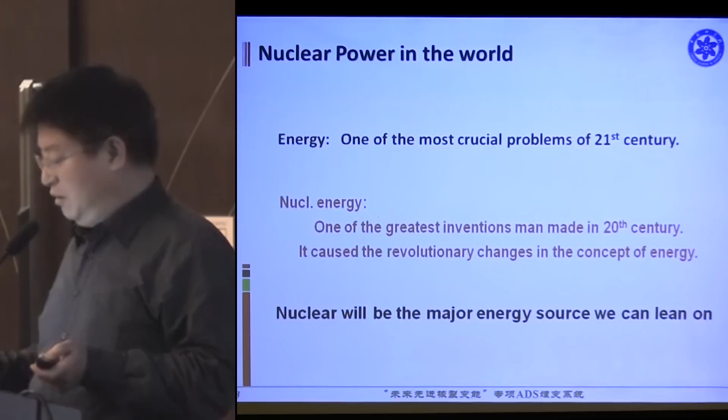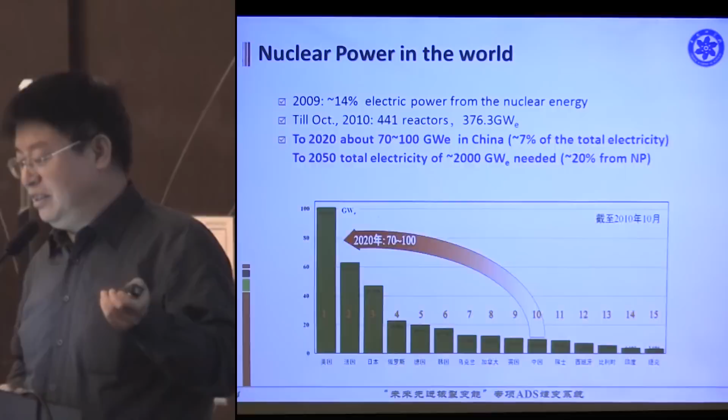Under this condition, we must face two main problems. One is the fuel, and another is the safety.

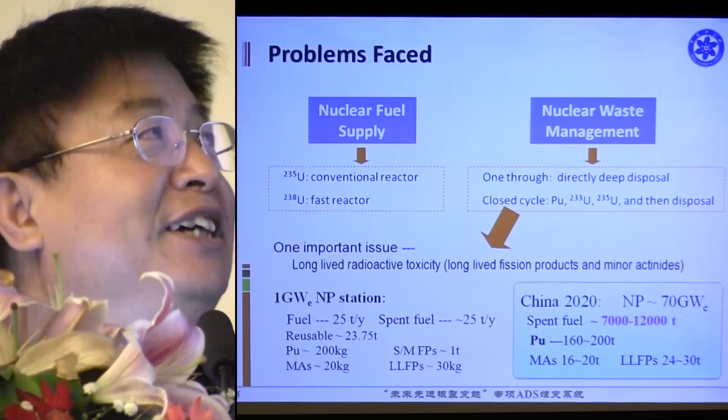For the fuel, you will know that CNNC have tried to solve this problem. And another issue is the waste.

At the beginning, someone suggested one-through treatment of the nuclear waste. But now, mainly we think of the closed cycle for the use of nuclear fuel.

The main important issue of this is the long-lived radioactive toxicity, such as the long-lived fission fragments, products, and minor actinides.

I show you here only one example for a nuclear power station of 1 gigawatt electric, where the fuel used may be 25 tons per year, and the spent fuel is also about this amount. The reusable amount, plutonium, and some short-lived and mid-lived fission products are about 1 ton, the minor actinides about 20 kilograms, and the long-lived fission products about 30 kilograms.

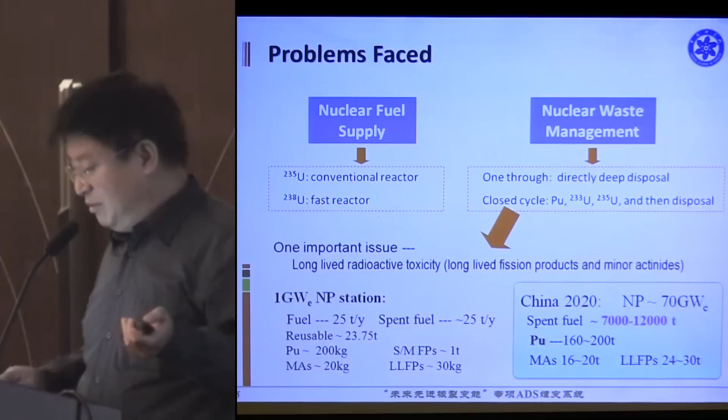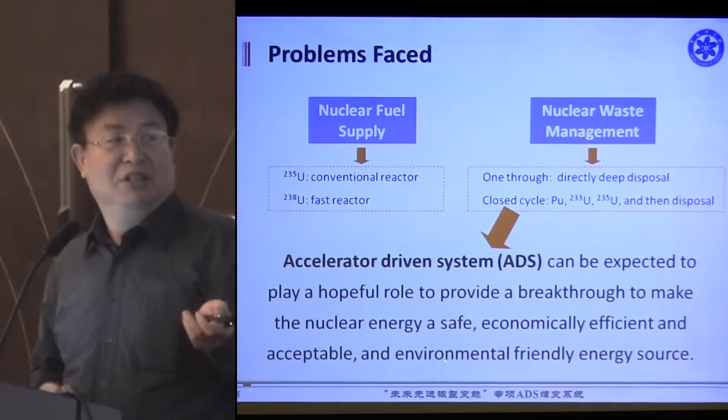So the problem we must address is the spent fuel. A lot of research shows that ADS may play a hopeful role to provide a breakthrough to make nuclear energy a safe, economically efficient, acceptable, and environmentally friendly energy source.

The principle of ADS is to use a high energy intense particle beam to bombard heavy elements and produce high flux of high energy neutrons, which then induce nuclear reactions and transmute the MA and LLFP. The constitution of ADS is the combination of accelerator, spallation target, and subcritical reactor.

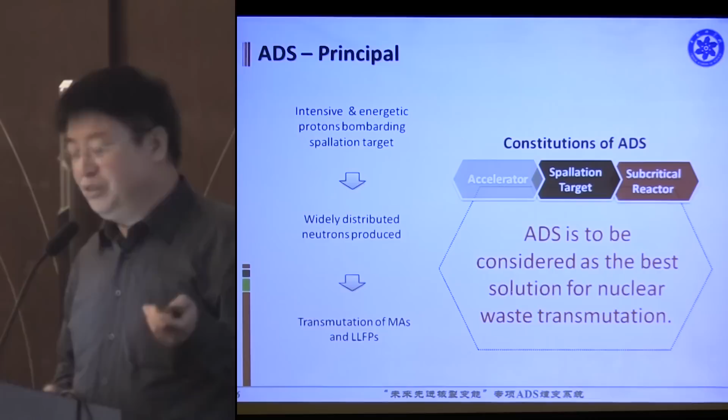From the research results we have got, now we think ADS is to be considered as the best solution for nuclear waste transmutation. This is a nuclear waste transmutation cycle.

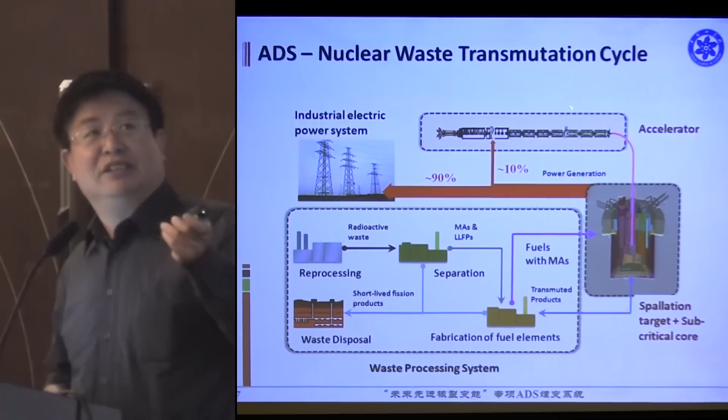This is for the reprocessing of the waste into MA and LLFP, separation, and fabrication of the fuel element for the ADS. During the working of the ADS, heat is generated, which can generate electricity. Part can supply the machine's own work, and another part is for the user.

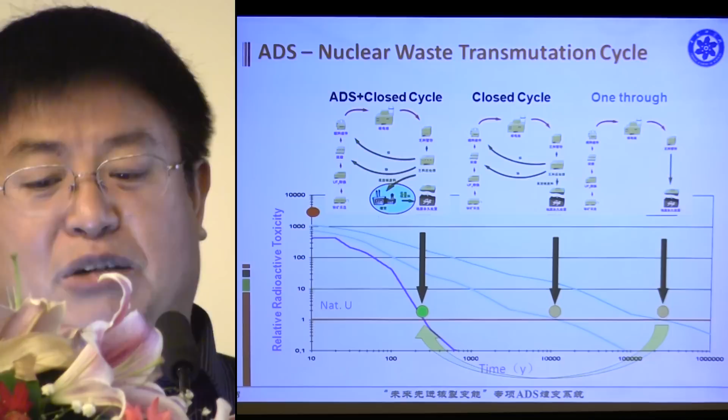For the transmutation cycle, if no treatment is applied and it is one-through, the lifetime of the radioactive elements or isotopes can be about more than a million years.

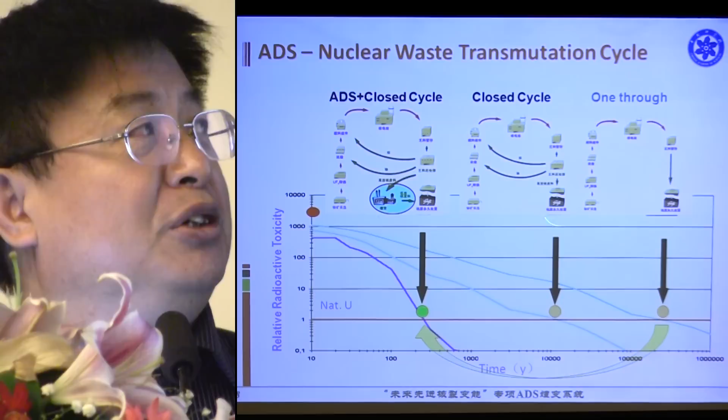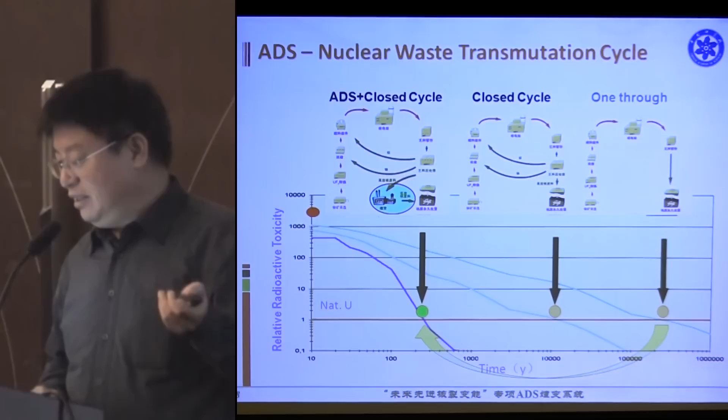After closed cycle recycling of the spent fuel, radioactive toxicity decreases. And if we use ADS plus the closed cycle, the toxicity decreases more, and one can predict and protect against the disaster from the spent fuel.

In the past more than 20 years, in the world, many groups have studied ADS, and some projects have been proposed by different countries, such as ATW from the USA, and the multi-purpose hybrid research reactor.

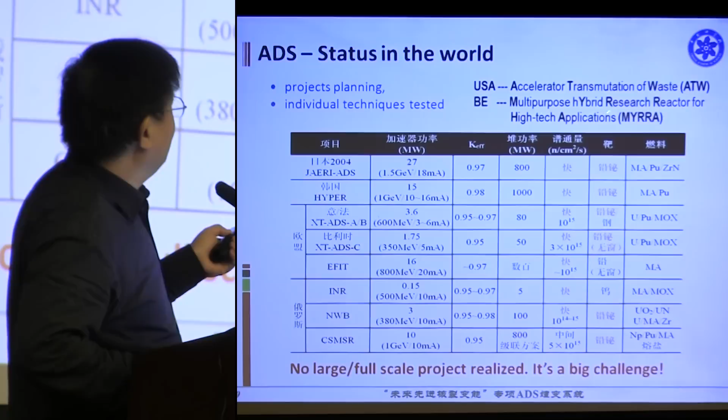For high-tech applications, MYRRHA from Belgium, and some from Japan, Korea, Italy, France, also from Belgium, and from Russia, and so on.

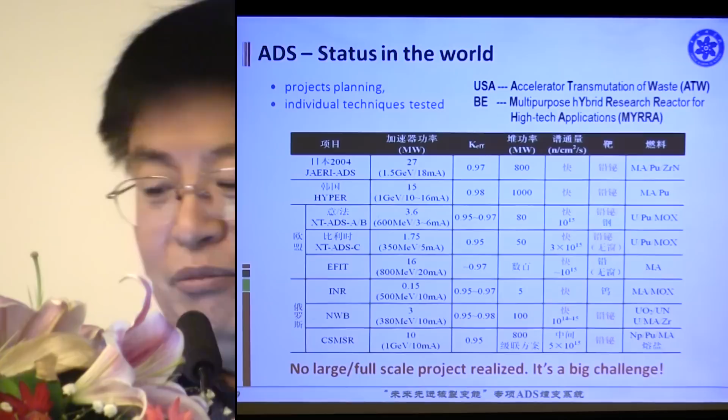The targets of the projects are mainly of two parts: one is solid, another is liquid metal, mainly lead-bismuth, and tungsten, and so on. This is some parameters of this project.

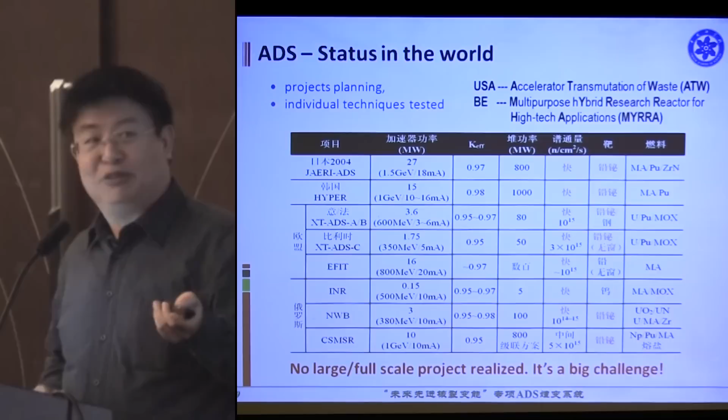And this is the fuel used in the plan used in the project. But now no large full-scale project has been realized, because it is really a challenge, not only for the scientists, but also for the users of the plants.

These are the two problems, and the solution for this is to use thorium, and for this, use ADS.

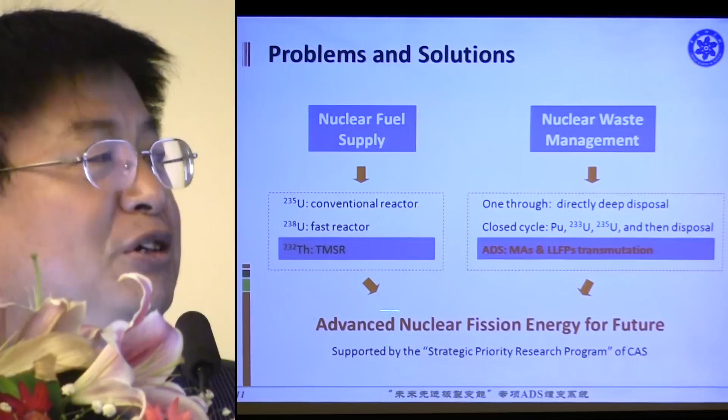The Chinese Academy of Sciences started a new project called the Strategic Priority Research Program. Both of these two parts belong to the Advanced Nuclear Fission Energy for Future project.

The roadmap of ADS of the Chinese Academy of Sciences is divided into 4 phases. The first one, from 2011 to 2015, is mainly for the technique R&D for the accelerator, target, and reactor prototype.

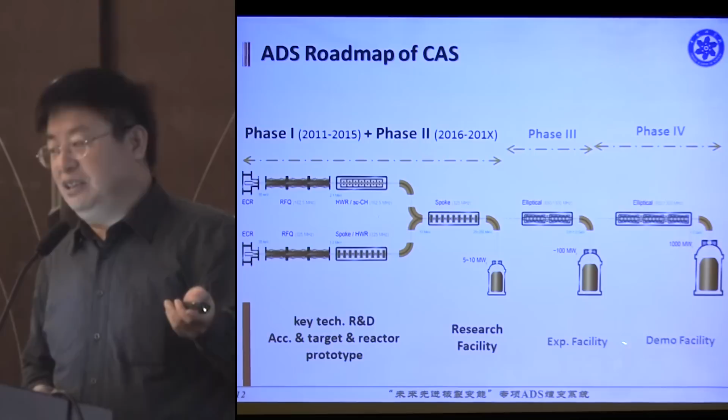For phase 2, gather the components to build a research facility. For phase 3, it's an experimental facility, and the fourth phase is a demo facility.

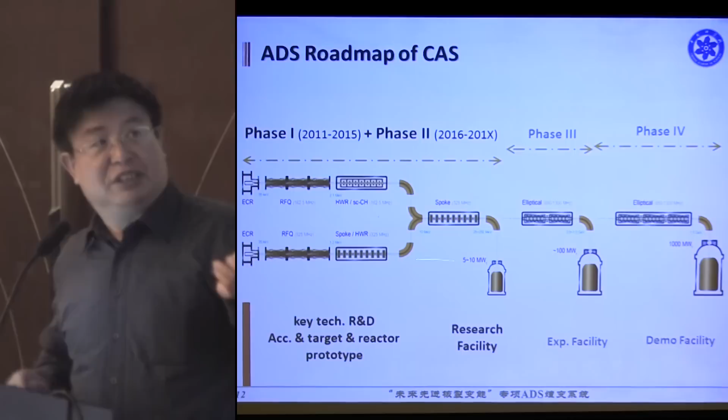This is the roadmap, using the ECR source, RFQ, some superconducting spoke cavity, and the LINAC, and this is the reactor.

The technical options for the accelerator are mainly a superconducting proton LINAC, consisting of an ECR source and RFQ and spoke. The energy is about 1 GeV to 1.5 GeV, and the current is about 10 milliamps.

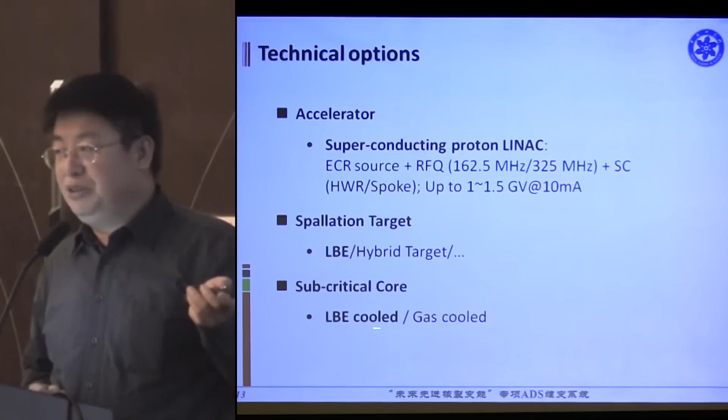For the spallation target, there are 2 selections: one is lead-bismuth eutectic, and another is the hybrid target, and also maybe a solid target. For the subcritical reactor, the first choice is the lead-bismuth cooled type or the gas cooled type.

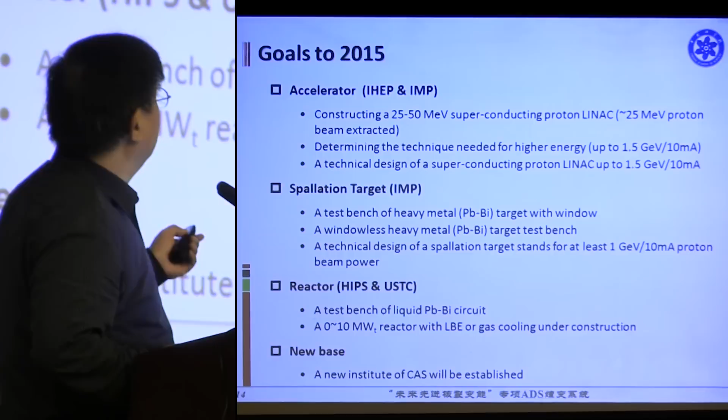The goals to 2015 for the accelerator are mainly supported by the Institute of High Energy Physics and the Institute of Modern Physics: constructing 25 to 50 MeV with a superconducting proton LINAC, determining the technique needed for higher energy up to 1.5 GeV at 10 milliamps, and developing a technical design of the superconducting proton LINAC up to this energy.

For the spallation target, mainly supported by IMP: first is a test bench of heavy metal target with window or windowless target, and also technical design of the spallation target for at least 1 GeV at 10 milliamps, proton beam power.

For the reactors, mainly supported by HIPS and USTC: first is a test bench of liquid lead-bismuth, and a 10 megawatt reactor with lead-bismuth or gas cooling. We also built a new institute for this project.

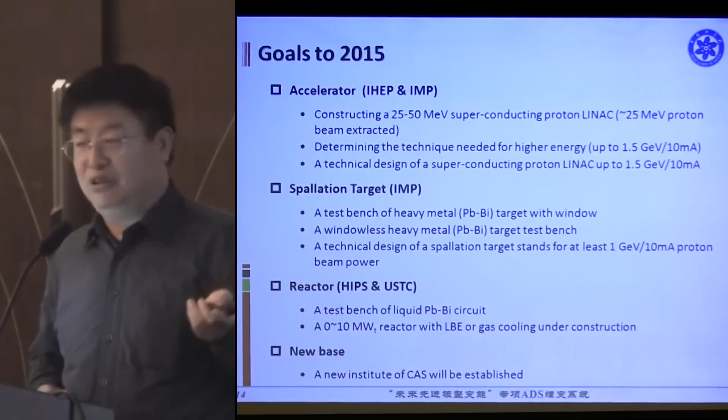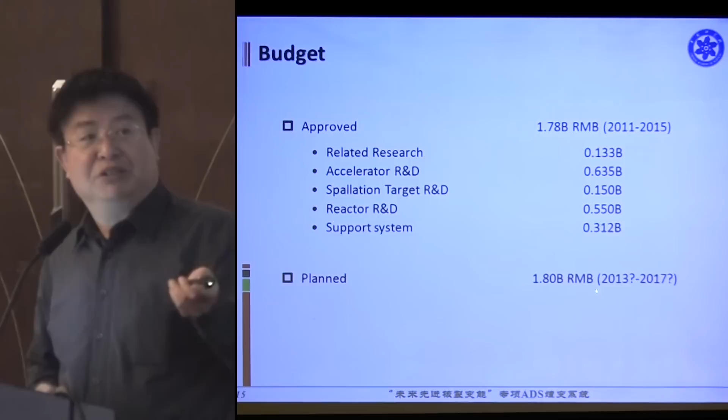We also planned about 1.8 billion Chinese yuan for phase 2. This is for phase 1, this is for phase 2.

The framework of ADS management is headquartered from the CAS, and then there is an international advisory committee, and also a scientific and technical committee, then the ADS research center, followed by the supported institutions.

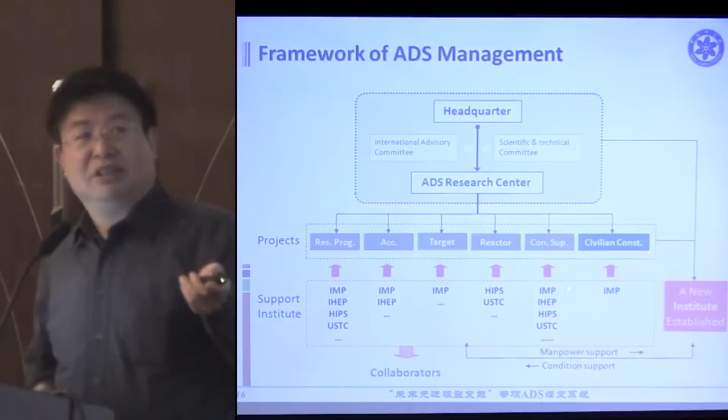For the related research, mainly from IMP, IHEP, HIPS, and USTC. For the accelerators, mainly supported by IMP and IHEP. For the target, IMP, and for the reactor, HIPS and USTC. For this support, IMP, IHEP, HIPS, and USTC.

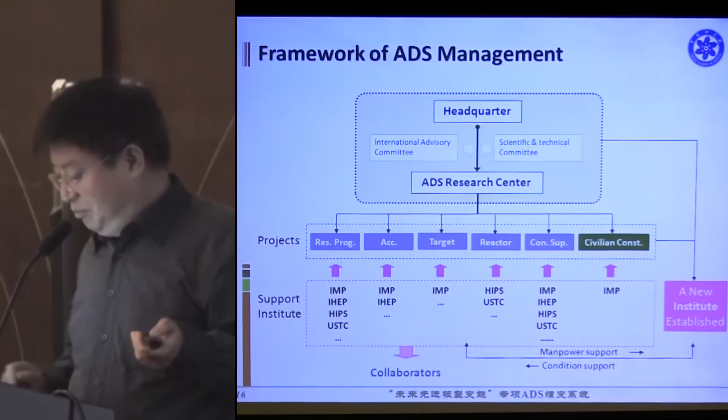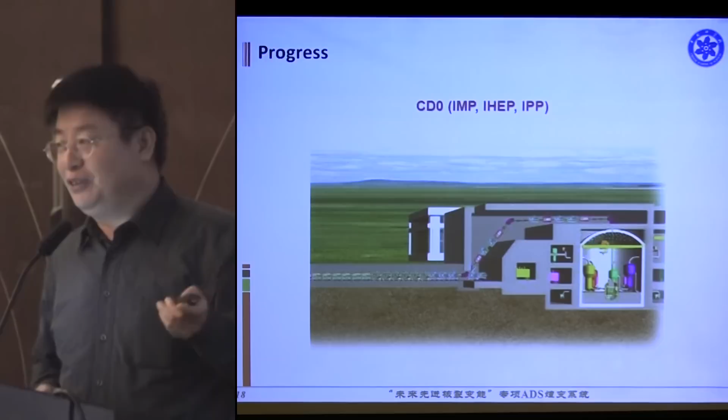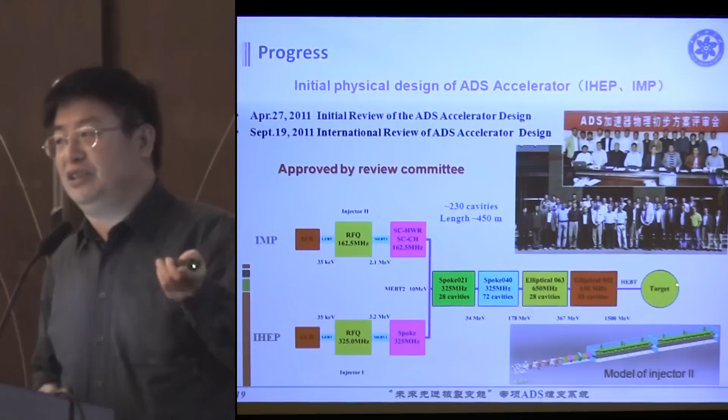There are 2 ways to get this. This is some progress: this is the ion source, now under commissioning.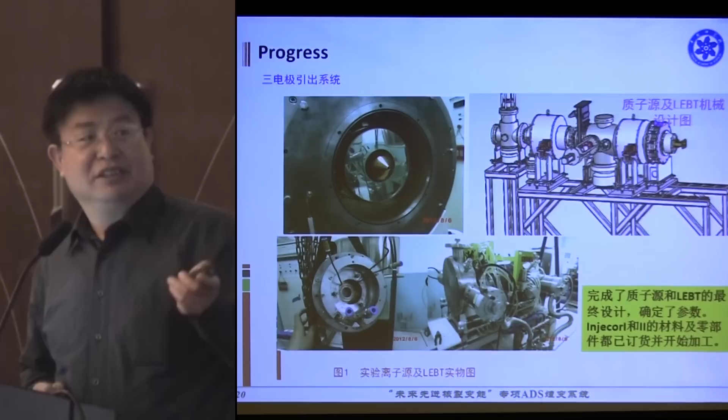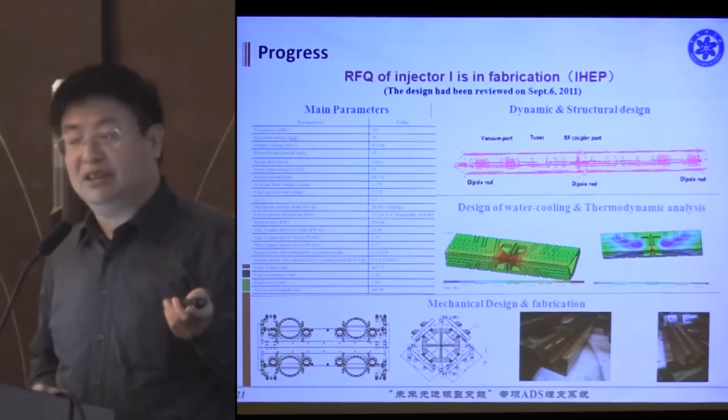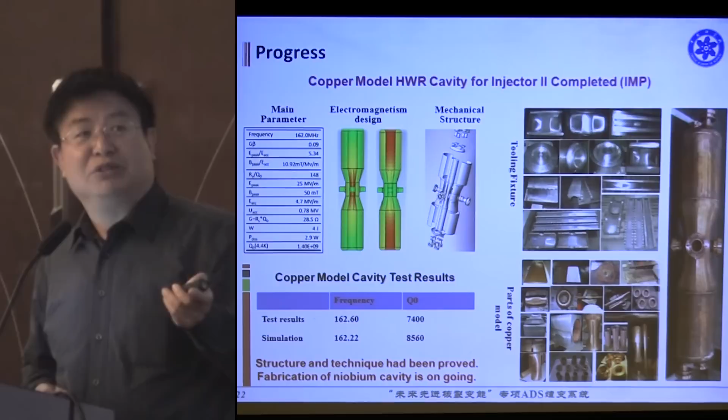This RFQ has been done now and is on test. And for the cavity and the niobium cavity, also done and now on test. This is for test on the liquid helium temperature.

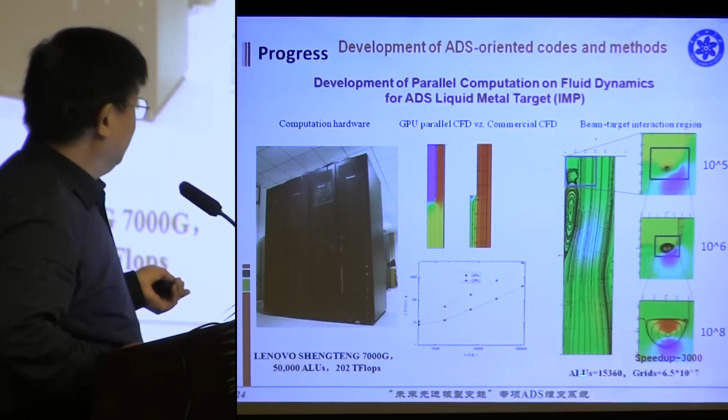For the development of ADS-oriented code and method, we use not only PC but also GPU to do this, and developed some code compared with other commercial code. We can calculate using this grid up to about 10 to 8, and also do some tests to verify the code.

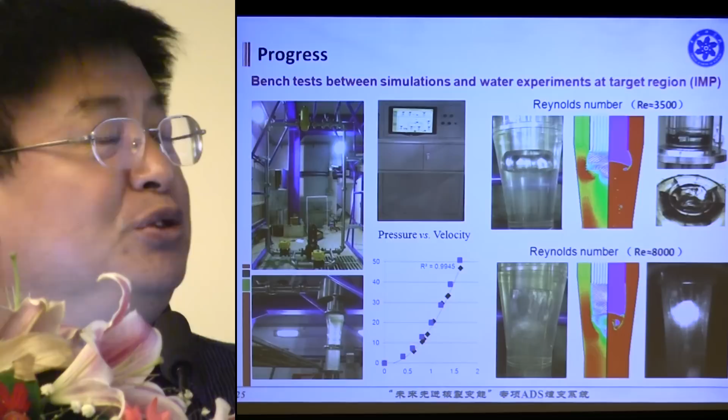For the test, we use water for the measurement, and also for nuclear data, because for neutron data with neutron energy higher than 200 MeV, there is a lack of nuclear data. So we use our machine to do experiments.

This is the accelerator. The energy of this can reach up to more than GeV. So we can use this to test some nuclear data. And for the measurement, we use light charged particles from the spallation and the neutron energy spectrum.

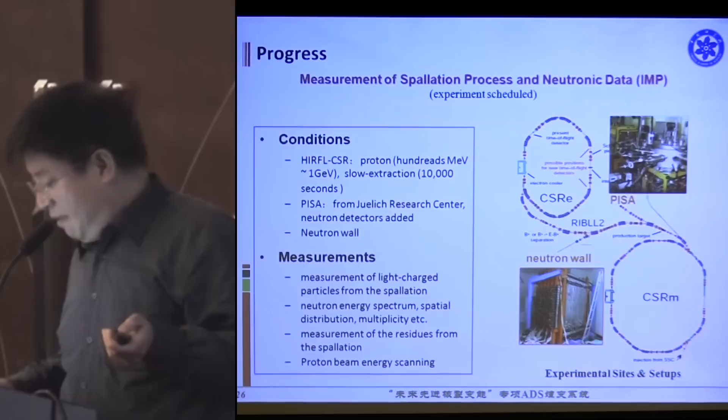Spatial distribution, multiplicity, measurement of residues from spallation, proton beam energy scanning, and so on. And this is one of the experiments with radioactive activation measurement, to calibrate the detector and try to get some new data.

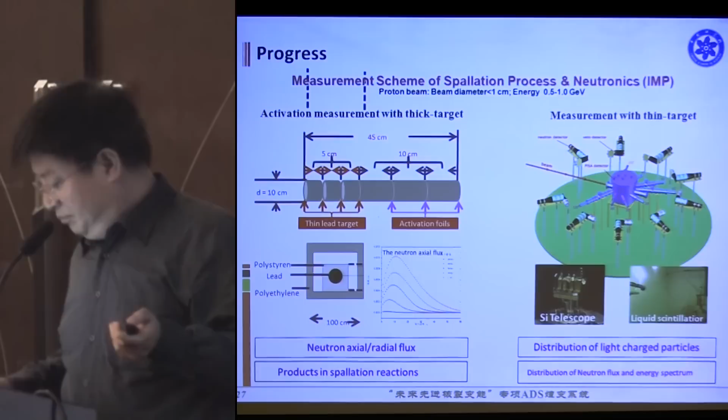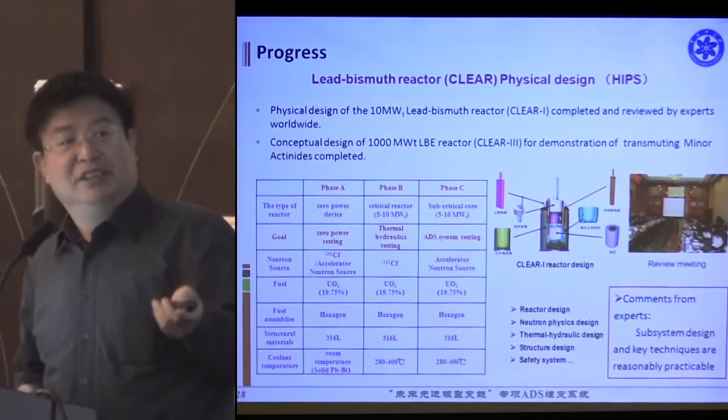And for the reactor, also done some preliminary design of this. These are the type, and this is the parameters, and this. And also constructing an LBE loop for the test of the liquid, the property of this.

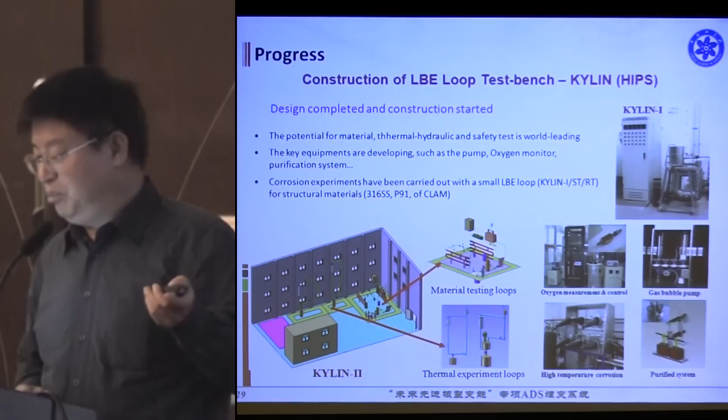This loop will be working next year, about April. And there's some other small test loop. Now I'll show you only a brief summary.

ADS is the best solution for nuclear waste transmutation. However, the development of the ADS system is really a big challenge for us. The CAS ADS project started since 2011, and some progress has been achieved. More specific investigations, such as high-intensity particle accelerators, target materials, window features, and so on, need to be done.

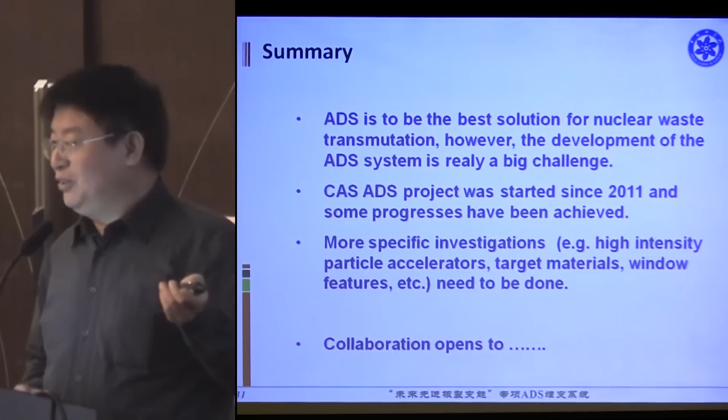And also, we now do some collaboration with others. Now we wish to do more collaboration with scientists from all over the world. Thank you.

Thank you. Can I ask how your linear accelerator that you proposed compares with the one at the Chinese spallation source? The power, the current, the energy, the overall design - is it similar, or is it an upgraded version, or is it something totally different that needs to be reinvented?

In phase 1, the energy is much lower than that. But the final goal is the same energy, but the intensity much higher than that one.

Takaki from Tokyo City University. You mentioned ADS is the best solution for waste transmutation. I totally agree ADS is a very effective tool. In more technical terms, ADS has a very high transmutation rate. But the transmuted amount of minor actinides is almost proportional to the thermal output, thermal power of ADS. So in terms of transmutation amount, ADS does not have such a big number because the thermal power is limited. So I'm a little bit skeptical that ADS is the best solution. My question is: did you make a fair comparison between critical system and subcritical system, and what is the logical procedure you used to choose ADS as the best system?